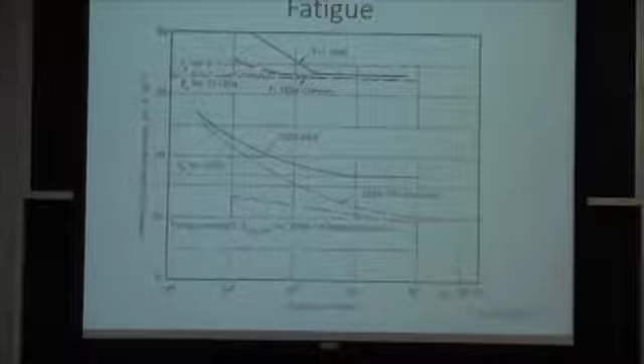Professor Eager asked me to prepare this relatively general talk, because today we'll talk about safety factor as it applies to different industries. There is a handout if you came after the others. The idea here is not to be super specific.

There are a few ideas I want to carry out to you, one of which is we don't really design structures stronger than they need to be. So when we say we have a safety factor of 2, that's based on a nominal analysis. It doesn't take into account all the worst case scenarios that we know of or we don't know of. So when you take everything into account, it's more from experience that we know if we build it twice as strong, we should be able to go through a 50 or 100-year life with a probability of failure on the order of 10 to the minus 6 or something like that.

So that's a little bit how we're going to go today, saying the safety factor of 2 is not for somebody to use, saying I have a safety factor of 2, well I'm going to put only half the bolts, I don't really need the others. That's not how it works. In reality, you only have a margin of, say, 20% or something of that order. And it's just for whatever mistakes along the way, or improper use, or any condition that was not considered in the overall analysis of the original design, and normal statistics.

So that's a little bit what we're going to go through. There'll be quite a few examples. I know Professor Eager talked to you guys a little bit about welds and weld inspection, so we're going to go back a little bit to welds and bolts today.

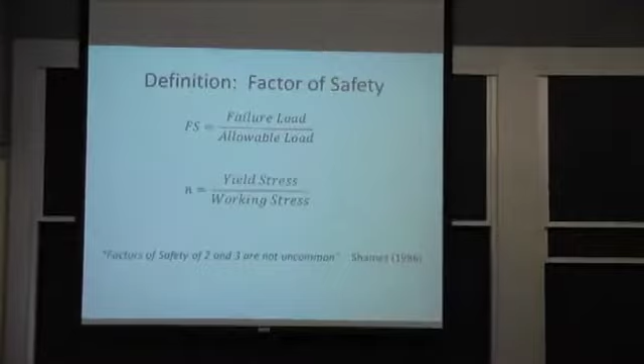When somebody that's been working, say, in automotive, says they use a safety factor of 3, they have a very particular way of calculating what the capacity is, the failure load, and what is an allowable load for that structure based on wheel data. They put sensors on the wheels and go through rough roads and say, well, this is the highest load. Or they just take the weight of the automotive and divide it by 4 or something. That will make a big difference when it comes down to determining the safety factor you need.

Did you have a question? You answered it. Okay.

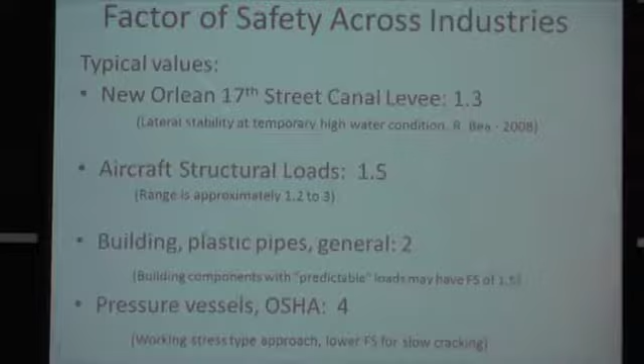So we have a big range of numbers. The failure of the canal levee in New Orleans was very unfortunate, and when they went back to the design, they said, oh, safety factor of 1.3. Well, it turns out that that's what they designed it for, and it wasn't enough.

And when Professor Eager talked about learning from disaster, that's an example, because even though you were supposed to have that 30% margin, and it's big, it's huge, it's relatively easy to analyze and inspect, I think there were issues with the soil. There were a lot of things going on that were hard to predict, 50 or 100 years before. And that's why at the end they didn't have the capacity they thought they had.

So it was clear that in this one the water level was not higher than what they designed it for. So in our analysis, we look at two things: the capacity of the structure and the load applied to it. So the load was taken into account in the design. It's not as if there was an earthquake happening at the same time. It was just water level. The capacity was not quite what they thought it would be through the design life.

The aircraft structures, I put a 1.5 safety factor because 1.6 maybe would be the one that I've seen most. I worked for a bit at Bombardier Aerospace. They make small airframes. And at the end of the day, you go to a lower safety factor around the landing gear. It's typically very well inspected, very well determined. They have sensors everywhere to know exactly what the load history is for the landing gear, and therefore they can afford a lower safety factor.

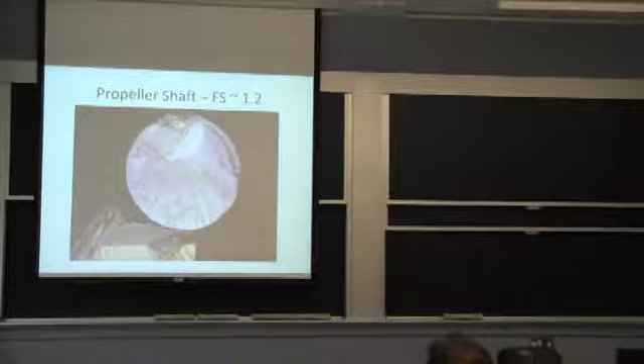I got 2 examples here. This is somebody I did a big project for, and he had a fancy high-speed boat he was using in Florida. It's about a 4-inch diameter axle, connecting all the way, sticking off the hull in the back and connecting the prop. It went only to, I think, a season and a half.

So he was into his 2nd season, and the prop fell off as he was on a ride. He was really surprised, that's why he brought the piece. He wanted to figure out what happened.

Because it was fairly high performance, it's not really a catastrophic failure. I mean, it depends how you look at it, but the boat stops and then you need to use the radio and get somebody to pick you up. It's not that bad compared to other types of failure. So they had a very low safety margin, and this was a type of prop that sticks out of the water half of it, so you only have the lower half in the water.

If I try to do here, let's see, I'm out of luck. Huh? Where are the chalks? I have to bring my own stuff, maybe. That sucks. All right, no board writing today.

So it sits sticking out half of the water. You have a lot of bending in that axle. As the shaft rotates, what I would expect is to see cracking initiate all around, because that highest load would change location as I rotate, unless I have an unbalance in my prop or something like that, maybe it could be localized.

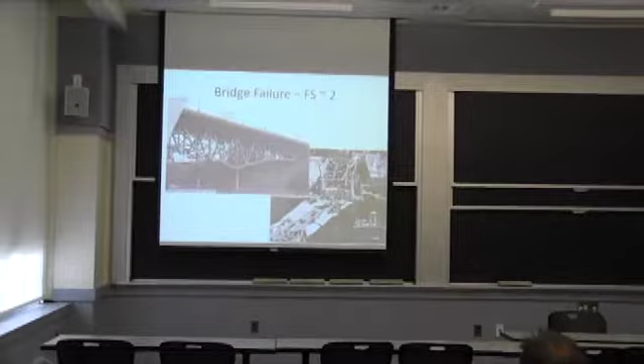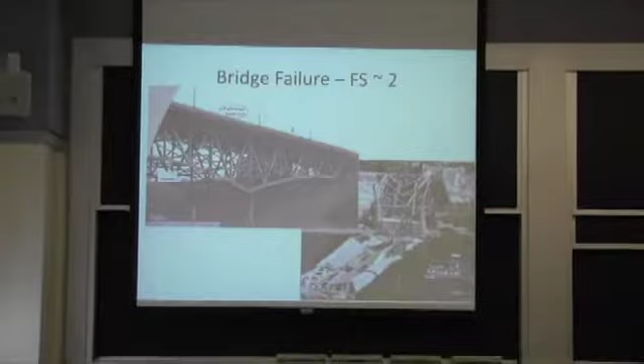We'll talk a little bit about the bridge collapse in Minneapolis. That happened, I believe, in 2007. It wasn't at rush hour traffic, but kind of just before it, I believe. It was late in the afternoon. It was a very hot day. So if you're thinking about a steel structure, a very hot day means thermal expansion. It probably had something to do with it.

There was a lot of dispute because this collapse was investigated first by NTSB, and then MnDOT took over, and then experts for the different parties involved also got involved in analyzing how it all happened. So you have the bridge to begin with. It only had two main trusses, one on each side, and it's connected here in such a way that if you fail one of these connections, the bridge is gone.

Everybody's analysis proved that. Now, despite that fact, URS, a very large construction company, looked at the fatigue life of the structure. They did a fatigue assessment after approximately 40 years of service, but they only looked at the members. So at the end of their report, they say the members are fine, but we don't know about the joints. So what good does that give us? Really nothing. You shouldn't do something to feel more safe while in fact you're not looking at the right thing.

I would say around 80%, maybe between 70 and 90% of failures happen at joints, especially if you're looking at a structure that's that complex. In this case, we were looking at gusset plates. So you have members connecting.

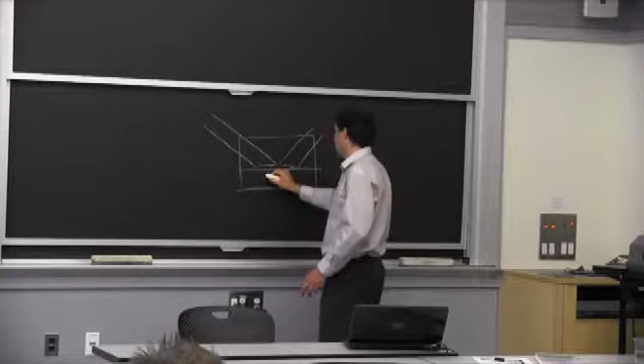Apparently, and that's what the government found - whenever I present these cases, I was involved in it so I can't talk about all of it, so I'm mostly going to do pieces that can be helpful to you guys, and mostly public information that was provided by some people that did the testing.

What the people at NTSB had done is they went back to the design drawing and looked at the thickness of that plate, and somebody said it wasn't thick enough according to the rules of designing back then. Well, that's not good, because if we start with a safety factor of 2 but we miss out on the thickness right from day one on the erection drawing, we don't have a safety factor of 2 anymore. It's less than that.

And then you can imagine that after 40 years, that bridge had lanes added, pavement added, corrosion, and it came down. If you add it all up, there wasn't any safety factor left. The load applied exceeded the capacity of those joints.

Was there ways to prevent it? Of course there were. These inspections were going on regularly - not every year I believe, but maybe every 5 years - they had inspectors. Whether it was a little inspector or a super big inspector, it's a little different when it comes to maintenance than when it's a new structure.

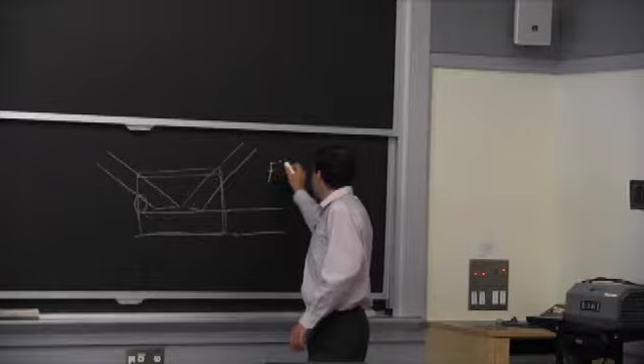We had a factor of safety of 2. Well, you look at it after the fact, it's not 2. You just try to figure out if you lost 50% of your safety factor or if you lost all of it. That's what it boils down to. And you hope that it was actually designed with the intended factor of safety, which is not always the case.

So a very sad story. I was involved in the investigation for a while. And one of the issues was also the rollers here to allow for expansion and contraction of the bridge.

It's clear that they were not moving as much as they were supposed to move, which means that the bridge was warping up and down or sideways or in some form of ways over time, and that was not taken into account in the original design as well.

If you do it symmetrically, say on the east and west here, that may or may not be a problem. But if it turns out that one side is stuck and the other moves, then you start wrecking your bridge as you go back and forth from one season to the other, and it becomes a problem or a potential problem. So on a big structure like this, I would say...

When you're designing it, I think it's very hard to take all of it into account, and that's why you put it here as a safety factor of 2. But like I mentioned in the introduction, it doesn't mean you put half the bolts, because a lot of it are things that are very hard.

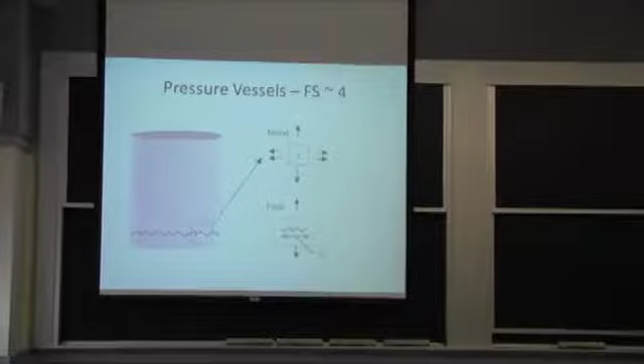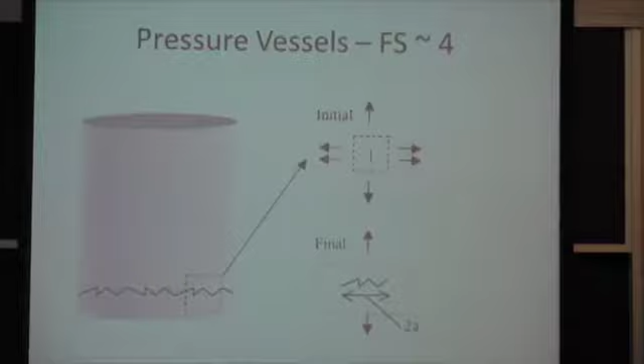Pressure vessels. I want to talk to you about two examples. The first one is just a simple pressurized stainless steel tank in a food processing plant that was mostly intended to hold, I think, tomato paste or something like that. So it's not especially corrosive, but it has to be clean. So it was a nice stainless steel tank.

And it turns out that it was a heated process. So they had a jacket around the tank. Turns out the jacket had a lot of chlorides in the insulation. And therefore, something that they were not expecting did happen, which is called stress corrosion cracking. It started to crack from the outside of the tank.

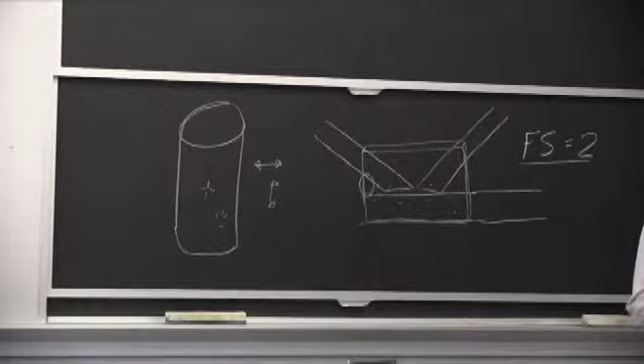So say we have it here. It's pressurized. So it started as a little crack running this way. And then at the same time, I also saw cracks almost going in random direction. It will look a little bit like this. Now, when I see that, and I know my stress level in this direction, so for a load applied, the hoop stress this way is twice what the longitudinal stress is on a closed pressure vessel, I know there's a problem, because it means that my cracking doesn't vary much with my stress level.

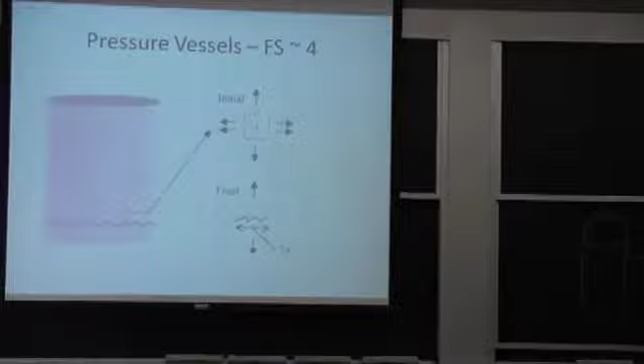It's just cracking. So even though I started with that factor of safety of 4, which would typically be with respect to yield stress, I can have stress corrosion cracking at a load 1/5 of that yield stress, depending on the chloride environment, the temperature, and all that. So all of a sudden, I don't have a safety factor.

Now, in that particular case, it's really a problem with respect to what I expected the capacity to be. If you expect a ductile behavior of a piece of steel and it fails in a brittle manner, that will make a huge difference with respect to safety. And that's pretty much what happened there with that stainless steel tank.

I mean, in normal condition, it would just crack and leak or do something like that. But what really happened instead is it just started to crack, and these cracks all connected, and eventually a big piece came off, and it was over pressurized as well. So there were a bunch of issues going on, but one of the main contributors here was an unexpected failure mode. And that's the idea I wanted to carry here. It's one of the reasons we have a high safety factor.

I've done another project that was for a steam piping system connecting in Washington, D.C. with, we didn't go to the White House, but it was supplying the whole government building area. And we looked at a drip leg that essentially was collecting the condensate. So say you have a line, and at the bottom of the line you have a jump here between different sections. So in the manhole you have a little drip leg here that collects the condensate and redistributes it back to the system. So the connection here at that drip leg was built in an unusual way.

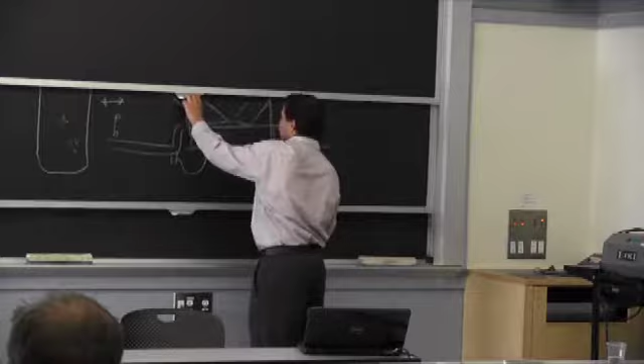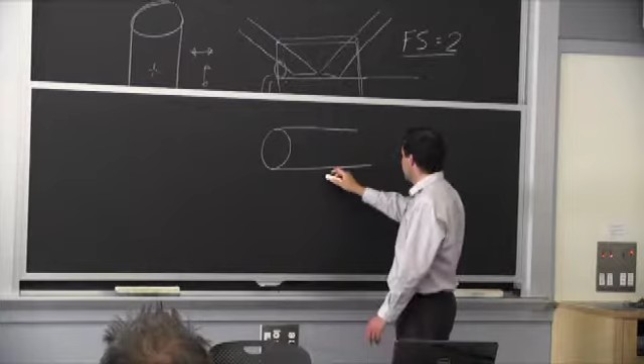So it had the proper material thickness, but I'll show you the detail of that one so you get an idea for what may have happened. So the pipe was running, so I'm going to show the pipe running this way. So if we start from here and we have a leg that's connecting straight through, so it looks somewhere like this.

So it's really two tubes connected to one another. This one is smaller, that's our leg. Oh, and we're actually going to look at that cap right here. Yeah, let's do it this way.

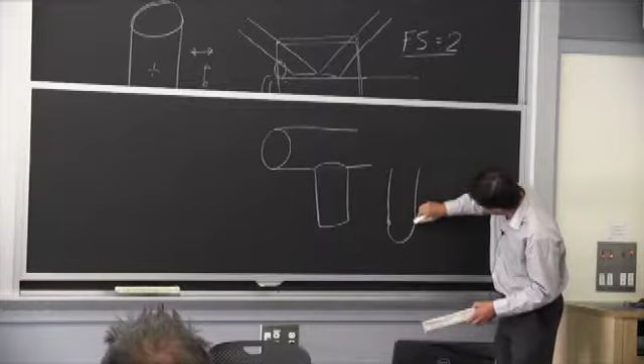So that's how it looked from the outside. So instead of having a bottom that would look like half a sphere, something like this, you could put a weld here, and the weld is essentially subjected to the same load as the wall next to it. What they had was the weld in this corner, and when you pressurize this design detail, it just wants to expand.

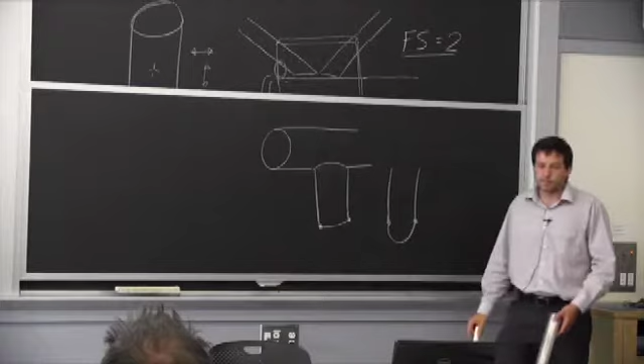So you're cracking open those welds. You started with a safety factor of 4, 5, 8, whatever it is. Now, instead of having just a tension stress on the welds, if I blow this up, the way it looked is they had an end cap like this. They had the wall here.

And it was sort of welded here. So what happens when you pressurize this, the cap wants to bend out and become more like half a sphere, and create tension here at the toe of the weld—at the root of the weld, I'm sorry. So the toe is right here, but at the very root of the weld, where you can't really control the quality, you know you have imperfections there, that's where the highest tension was. So unzipping from that root was not a very hard process.

It's not something... well, actually, the code says you're supposed to use these kind of caps, or find a way essentially not to put the highest stress on your welds, because otherwise there's no point in having these thick walls if the capacity of your connection is only half of the capacity of everything else for this application. So we were looking at something that was 3/8 of an inch, or maybe half an inch thick wall, with a little more than maybe 3/4 inch cap, and it had this weld that was pretty much the same size, but loaded in tension at the root of the weld, so no more safety factor left.

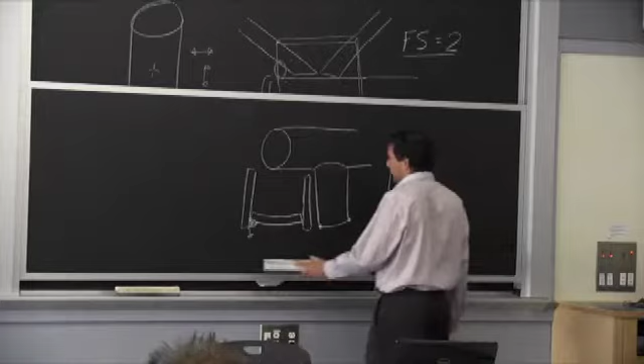When the transient loads came up with a big water hammer, this was really ready to go. So that's how you consume safety factor.

So was that how it was designed, or was that a decision made during construction? I would say nobody was able to show exactly who made the decision. So it was possibly part of a repair, and that's part of the problem sometimes. If you go to do a repair, they know they have to use the right thickness, but when it comes to the detail and how to do it, that's probably where they were lacking proper engineering of it.

So if we're looking at these factors of safety, and we're trying to decide, do we need 3, do we need 2, 1.2, 4, 5, 8? I've seen designs that have a safety factor of 8 actually, and people can still break the stuff, but not the way it's supposed to be used.

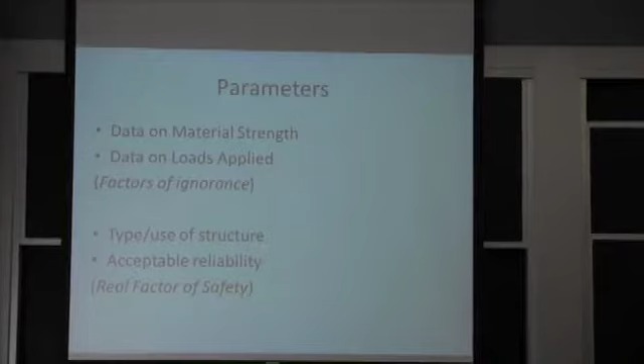Even the little propane tanks—if you want to solder something, you go to Home Depot, you buy the little propane tank with a torch on it. They have high safety factors, but if you drop it from 6 stories high, eventually something bad can happen.

Well, okay, we talked a little bit about material strength, and I said something like, if I have my steel 4340 on the landing gear and it's going to be inspected, I know what I'm getting, and it's pretty much true. If I deal with a casting, for example, I don't know as much, and a lot of times with a casting we have an additional factor of safety that we put in, because we're going to inspect it a lot—there's going to be something additional, it's not as predictable.

If we're looking at the environment, it's a good example when I showed you the chlorides from the jacket of that pressure vessel on stainless steel. If I don't take the risk of slow cracking into account, or if I cannot rule it out, then I need a higher safety factor. Actually, I should figure out whether there's a risk for that environment to be there—temperature, moisture, and chlorides, in the case of stainless steel.

But the less you know, that's my factor of ignorance here. The less you know, the more of a safety factor you need. And sometimes it's not a question of effort—sometimes for an application, you just don't know all the possible environments. So you have to be more conservative than if you have your landing gear and it's going to be inspected regularly. You don't allow for any significant corrosion to take place, a very controlled environment. Then you reduce your safety factor.

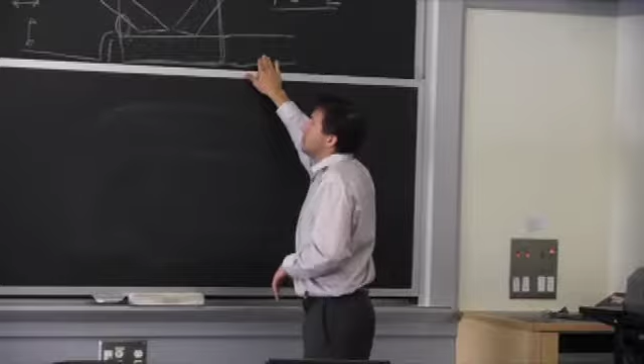If you go back even 30 years, when the Minneapolis bridge was put together, they couldn't do even the finite element analysis that we would probably do today for such a bridge, given the details that were in it, or we wouldn't do the details. But if you start with a bridge and you have your safety factor, down the road, it's by experience.

If we've been building thousands and thousands of bridges over a 100-year period this way, and we get the failure rate that we're willing to go with, there's no reason to change the overall safety factor. If we're getting more failures, a little bit like what I'd say is happening with the valves for blowout preventers, then you have to raise your safety factor. You're just not good enough. That's the experience aspect.

If you're coming up with new products, you may do a lot of testing, actual laboratory testing or field testing, to see if you've taken everything into account. You do that a lot in aerospace. I remember, for example, the wings for small jets being moved up and down—held where the fuselage is with all the bolts on—and they moved the tip of the wing at least a foot up and down to go through excursions, maybe more. They had the extreme one, so the very last cycle was kind of all the way until it breaks, and it was a lot of deflection.

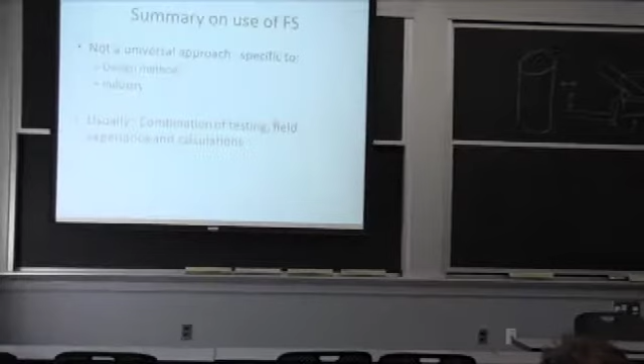It doesn't really apply to the primary structure—you don't want the frame to wreck completely. So a lot of times, to know your safety factor for the frame, you do need to do some analysis. But if you're really looking into evaluating if your overall assembly is going to fit the function, there's nothing like a full-scale test or a field test to demonstrate that, and it's required for a lot of aerospace assemblies, and they do it also in automotive and with recreational products. So calculation's always good, but my point here is if you're only going to do calculations, I would say boost your safety factor, because there's so many things you may miss out on in the integration of your assembly—things that are much harder to predict ahead of time.

So when we arrive at those safety factors, I mentioned it's from experience. I'm not going to tell you that people did a lot of statistics when they came up with safety factor 2—they didn't. Today there are a lot of people, and I have a book here, full of statistics on how you could relate actual failure rate to individual parameters and stuff. We'll use some of these ideas just to get an idea about what happens between a safety factor of 2 and a failure, whatever that is. Because again, my basic line for you to take out today is we don't build stuff much stronger than it needs to be, so we can't think of the safety factor as something that anybody can use for their purpose.

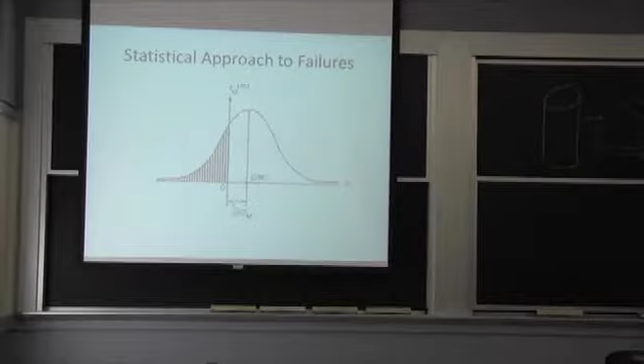So if we go to the lab today and we have 5 welds and we test them, we find out the strength in tension. Well, probably these 5 welds were made by one guy. If I have other welders do it, they'll do it differently. If over time they're instructed by different people, it will also change.

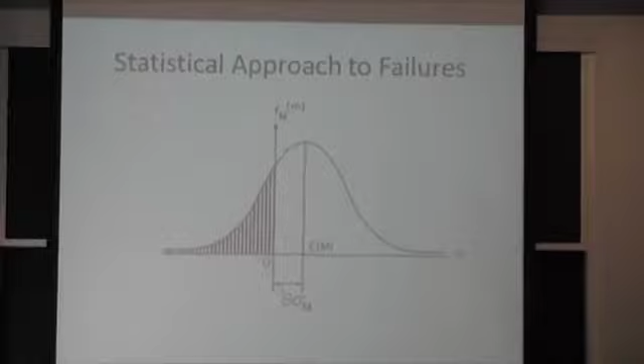So when you come down to a large population—I've just put on this basic statistics here, it's a Gaussian normal distribution, and we're out here about 1 standard deviation—it will essentially say 65% of the population here is in the good area, and then you start having failure for the lower 35%. So that's something that can happen if I run these 5 tests. I still have that tail of strength levels that are quite possible coming from different welders, different inspectors, different instructions on how to do it.

But I'm not going to know that. So that's why I say after the fact you realize, well, I really need that safety factor because I have variation. That's the idea. If the variation is tight, if that curve is really tight because we're dealing with a machined steel component, no welds, no nothing, like in the landing gear, then I'll go with a lower safety factor. My standard deviation is much smaller.

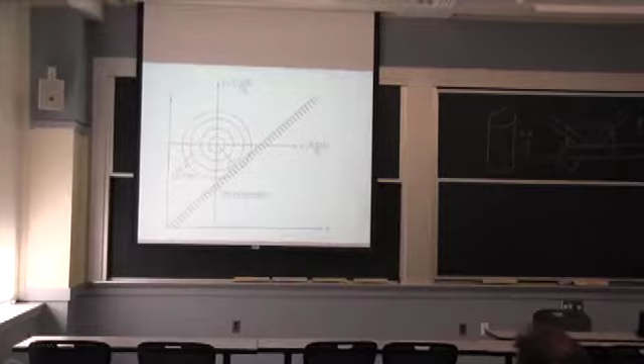So that's the book here, just in case you're interested in the details. It's a lot of statistics, like I mentioned. So what we have here is a plot of capacity, that's the vertical axis, against the stress level. So it's centered, say, where we would do the design. Say we have here a safety factor, looks like just about 2.

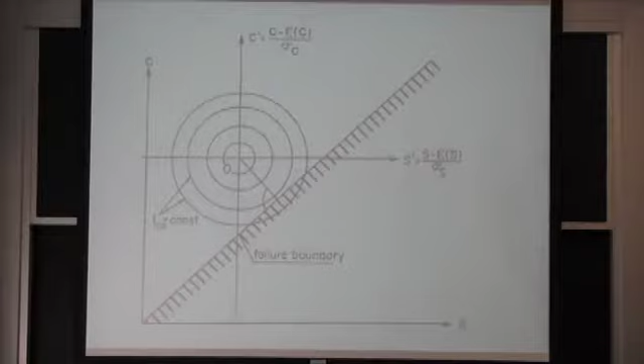And then we know we'll deviate from that. This one is circular, but it doesn't have to be a circle. It's likely... well, I'll take this back. It depends on the application. If I'm dealing with a pressure vessel, and I know I don't have transient regimes, I would say I know my stress very well.

So on the horizontal axis, I could make this circle more an ellipse pointing up and down because I know my stress level, so my uncertainty about that one is going down. For that same pressure vessel, if I don't know all the chemicals that may be used in it, or the kind of jacket it's going to have, my material variability may grow, so that would make a vertical ellipse.

If I'm looking at something else, say I'm designing suspension for a car, and I'm making it out of steel, I know pretty much what the steel will do to me if it's not welded, if it's forged. So I'll have a relatively narrow variability in capacity, but then what people will do with the car, I don't know. It could be very terrible. If you take scenarios, they burst the tire and then the wheel hits the ground, and whatever happens, you can get to higher loads than what you would even make a measurement of in a field test condition.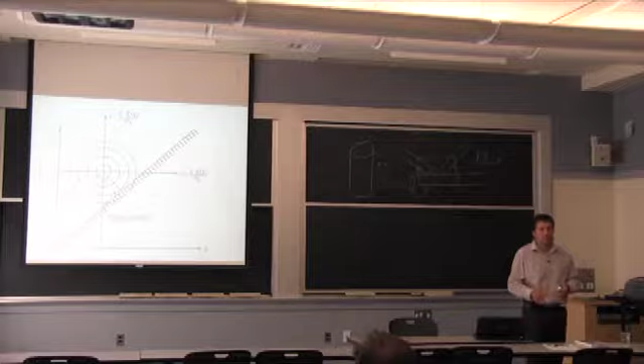Yeah, I would say hitting straight with the wheel decreases your damping factor, and that's where you essentially generate more stresses in the suspension.

So if you want to make a very detailed design and take into account what I just said, then you can put this target closer to the failure boundary because you're reducing your variability, or you're taking a worst case scenario. But if you're making an analysis based on the weight of the vehicle and thinking, well, maybe it's going to go on 2 wheels or something like that, then you need a higher safety factor because you're not taking everything into account.

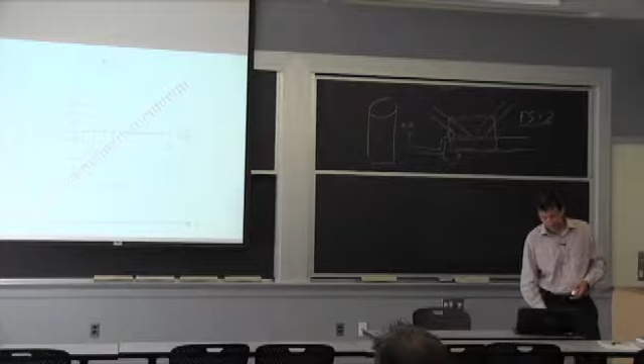So it's the general idea that it's not a factor of safety of 2 because I have variability in capacity and I have variability in stress level.

Now, what do we need at the end of the day? And that's when we talked about a 10 to the minus 6 type failure rate for bridges. What we're looking at here is this portion, now it's a 3D representation of the same thing we were looking at, where we have stress level and capacity. Where the cut is defines how much failure rate, how many failures you're going to get per year or per 100 years. It's a very important number.

At the same time, we cannot do the math to know exactly how to design different things starting from that principle. It just helps us realize we have that factor of safety, but I don't want to come up with a new term for it, but I think you realize it is there for safety. That's true, but it's not really the extra margin that you have. You don't have too much of a margin, and we'll go there.

It's just about time. This is how people define failure rates. So I was talking about bridges that have a lot of people on them. What happens here is you have T and L. The T is the number of years of service, and L is the number of people that could be affected by a failure.

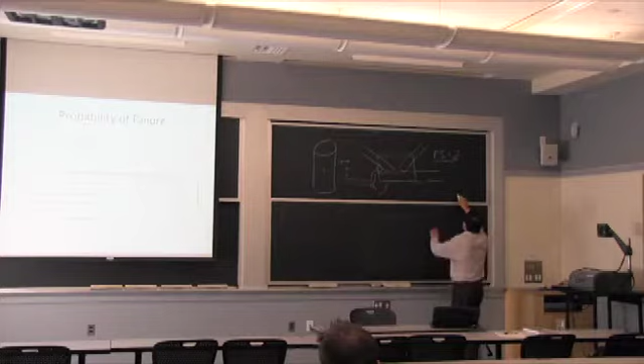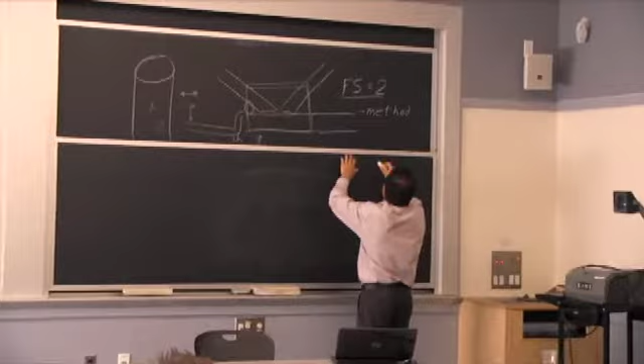And it's the combination of the factor of safety - I'll put the method here. What else did we talk about? We talked about variability. And I'm sure there's more, but if you start at least thinking of these three factors giving you a probability of failure, we're on a much better track than if we're just thinking, oh, we're just going to raise the safety factor. You can use a more precise way of calculating your worst case scenario, but get more knowledgeable about all the possible failure modes, like stress corrosion cracking, and eliminate them.

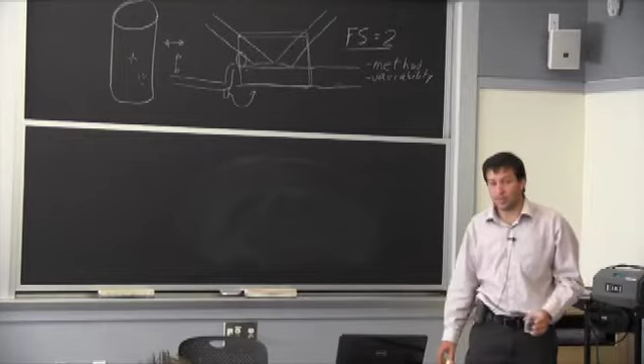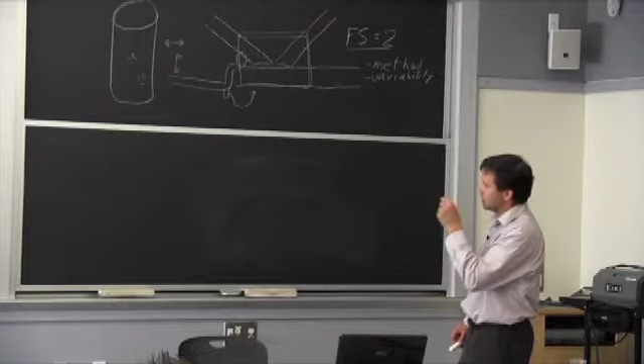Now that safety factor of 2 that we started with - say we start here, safety factor of 2 - that will give us, within a 1 sigma interval, so plus or minus, maybe 30% of the time, it's going to fail. That's not good. So it's the general representation when we're looking here at probability and we have this stochastic safety factor - that's the actual ratio of capacity over demand, after everything that was not taken into account. It's not by design, it's actual.

So you can see that if we start with a safety factor of 2, and what we want is a 10 to the minus 6 probability of failure - as a general case here, this is not always the same, it will depend on our method and variability - but as you want to reduce your risk of failure, your actual factor of safety goes down. So the probability to have one failure in 10 to the 6, if I start with a factor of safety of 2, means that I only have a 20% margin.

And that's I think the best demonstration of when I said put all the bolts in - that's why, because you don't have that safety factor of 2. If you put half the bolts, probably you have a 30% chance of failure or something like that. So that's the range that we're looking at as to what is our nominal factor of safety as opposed to actual, or stochastic, here.

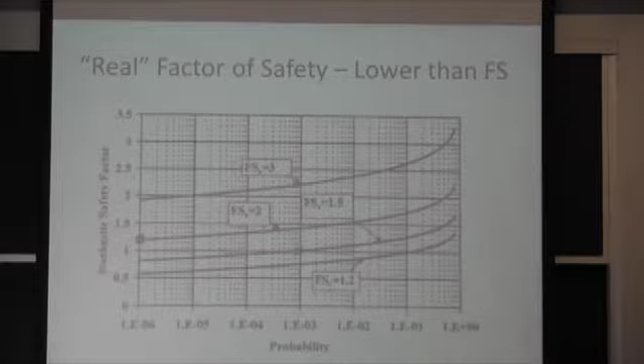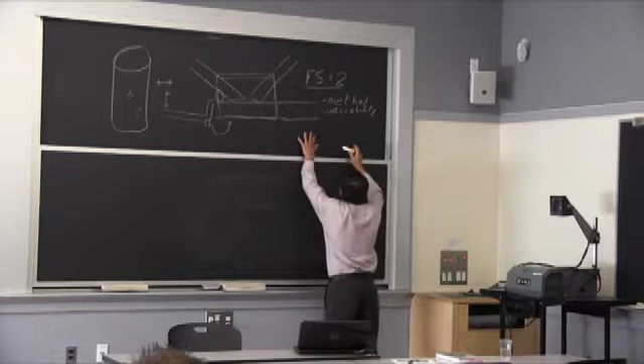This made me think - you can relate to this - when you start with a factor of safety of 1.2, then you get to a failure rate of 10%. It's a little sarcastic, it means 10% of the time you'll actually fail if you start with a 1.2. But again, the variability and the method will influence the shape of those curves. So you can have a long service life with a factor of safety of 1.2 if you are very conservative and detailed in your method, and you take into account all possible variability in terms of both the material capacity and the stress level.

That makes sense or no? Yes? Good.

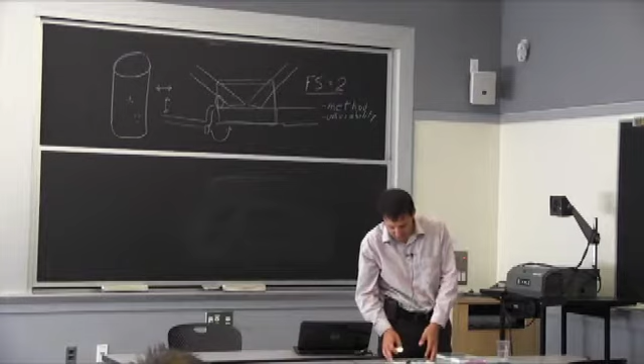Let's go through some examples. Now, so what I tried to do, I hope you realize, is bring a little bit of theory along with some examples, and I'm happy to discuss and get some feedback from you. This is kind of newly put together, but the idea is mostly to be as conscious as we possibly can about what that factor of safety means, or safety factor.

The spar for a helicopter blade - what we're looking at is a cross section of that blade, and it has an aluminum spar at the front here, and then a honeycomb core structure with an aluminum skin all the way to the back. So this could be about a foot across from the tip to the tail.

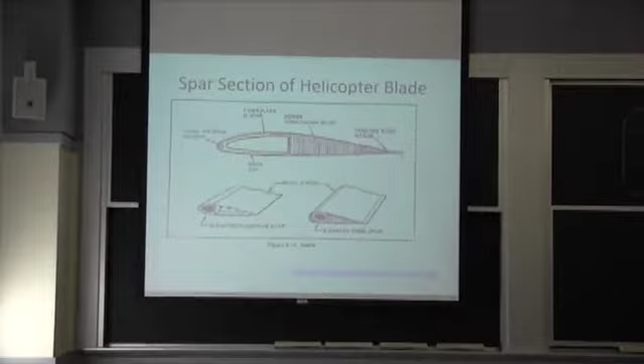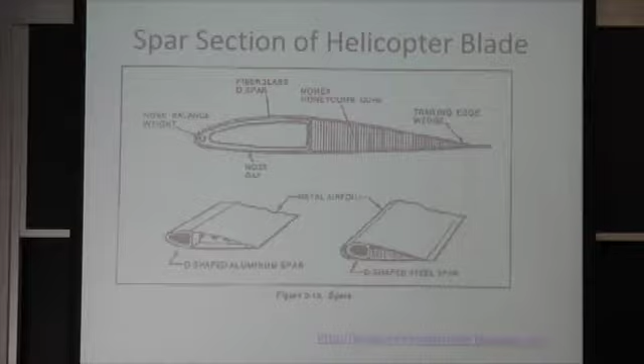It's subjected to a lot of load just by rotation. So if I draw that blade from the rotor, you rotate at high speed, so you'll have the centrifugal force creating tension this way. So we have the leading edge right here. That's where the highest tension is going to be because of what I call the drag force. So we have the wind, the air pushing the blade backward, creating that bending moment in the rotation direction. And then we also have an uplift.

Otherwise, the helicopter wouldn't be that helpful. So we can tell right from the beginning that we're looking at the highest tension right under that nose here, because that's where you have a combination. You have tension generated by the centrifugal force, by the uplift, and the backward load.

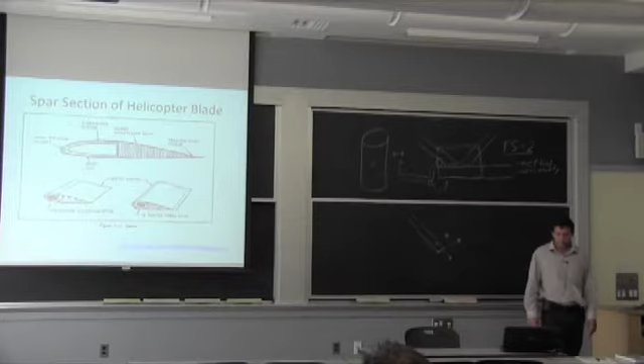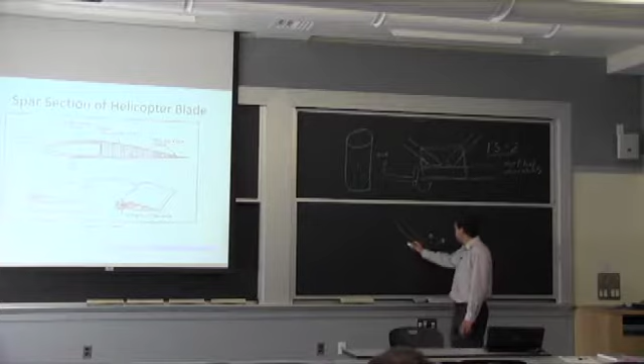Now, do we know that load precisely? No. The best way to get it, that I've seen, is they put strain gauges right there, close to the rotor, just before they had the stiffeners. So they put a strain gauge there, find out what the stress level is for different service conditions, going up, going down, taking off, turning sharply.

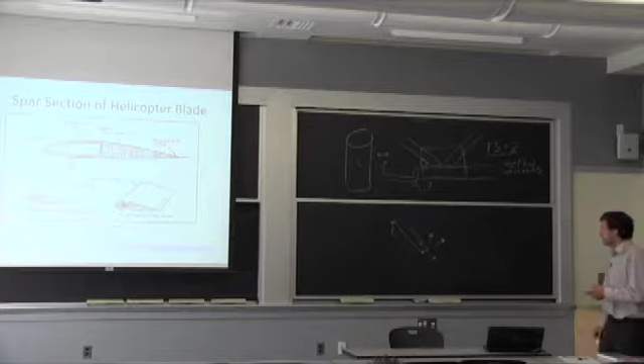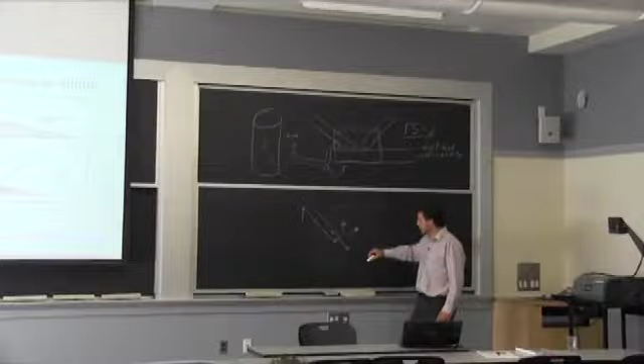So you get some idea and you can rate it. Landing and takeoff will definitely be the highest cycle for this centrifugal force. You just have to decide how many cycles you're going to be willing to go through, and determine the life based on that. So if I throw a number, say 30,000 cycles is what I want to go through. And then I know my stress level, so that would give me my number of cycles. Say my stress level max, I'll put 12 KSI. It's aluminum, not going to be too hard on it.

So what does it mean? It means that I need a sigma, I'll put it as strength because it's fatigue, and minimum, say we add 50% to that, so we'll be at 18 KSI.

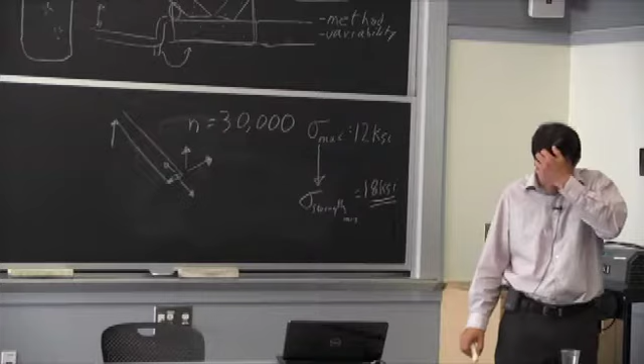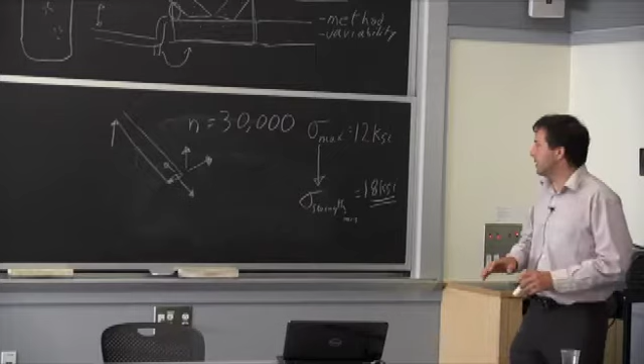Well, that's not that easy. It's not that easy to get an aluminum alloy that will take 30,000 cycles at 18 KSI, depending on the surface finish you assume and all of that. But it's the general idea. So that would be designing with a safety factor of 1.5 based on stress level. You don't want to take that number and divide by 1.5 and just calculate for another number of cycles to failure, because these fatigue curves are very sensitive to stress level.

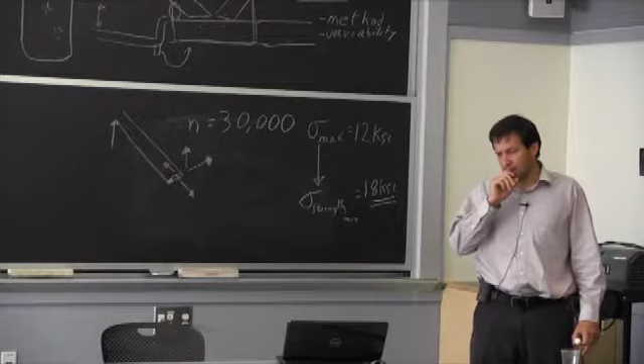So at 12 KSI, most likely you have infinite life, no issues whatsoever. But at 18, now you have a limited fatigue life, and you have to see if you can make it to the 30,000 cycles. That's the general idea. I've done that a couple of times, I guess, and you can get into the very fancy details.

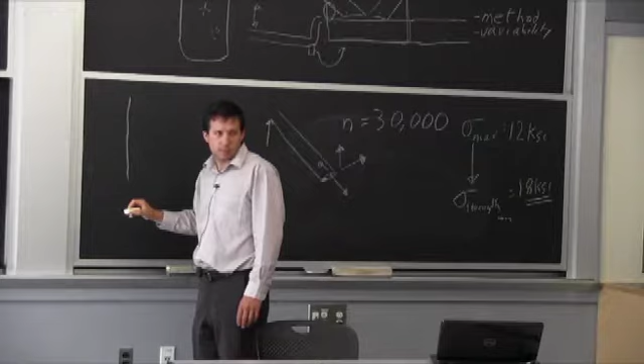I think you're all familiar with stress-life curves, SN curves. So you have your number of cycles to failure, you have your stress level, and you expect a curve something like this. Say now we have a generic material, but normally I'd be able to get 12 for one specific type of loading, if we're looking at tension or tension-compression, whatever it is, and we'll do the overall range here for stress level. So what I do, because I want a safety factor, I'm looking at 18, and now I'm looking to see here, given the variation in failure life, if I'm going to get my 30,000 cycles.

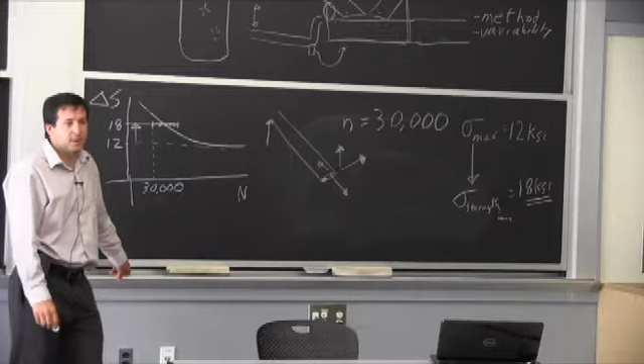That's the overall exercise, and we can go through the math. It's not that complicated. Typically, the more data you have to generate that curve, the tighter you can make your confidence interval here, and therefore you can satisfy yourself and everybody else that you do have your 1.5 safety factor. That's exactly how I would approach this in a schematic way.

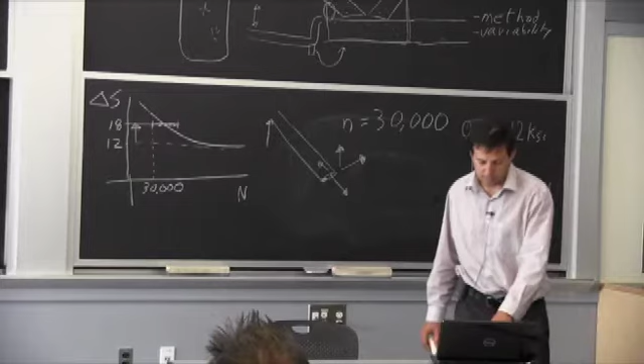So that's in reality, if we look at it, we have experimental data points. This is very different. Now the stress levels are higher. We're looking at some turbine blade data, so it's a super alloy type material. It's got a much higher stress level than what we looked at here for the aluminum.

So this was a situation where they were trying to evaluate if they could change the alloy from one to the other. And given all what we talked about, to get to a good reliability, you need your field experience, you need your testing, large-scale testing, you need calculation, you need all of that. So when you go and change material, a lot of times, to make sure you don't affect your factor of safety, you try to compare them with respect to every single property, or at least every property that matters for your design. And that's what we were doing here.

And the original alloy, I can't say for sure which one it was. I think it was the blue one. Yeah, so anyway, one alloy is the original, one alloy is the substitution.

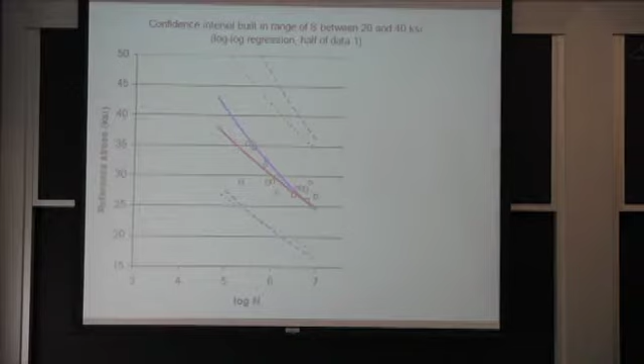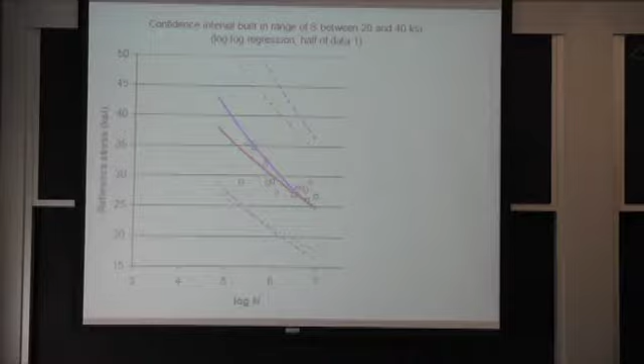Given the limited data you see there, because that happens when we're talking about fatigue, it takes weeks for each data point sometimes. So it's not easy to get a hundred data points and be as sure that you don't have a problem than if you're doing tensile tests. You can do a lot of tensile tests very quickly and figure out the strength. You're still looking at cost of material, cost of machining, and everything, but fatigue is a lot more expensive than the other things.

So the point here is you have those curves, and you see that they overlap. At the very end, you have the red line being slightly different slope, so it becomes a little higher, and you see that on the confidence interval. Those dotted lines are built essentially using the range of data.

Arriving at what is kind of the equivalent of standard deviation, but for a 2D plot. You can do it two ways: based on variation in life or variation in stress level. If you try to do it in Excel, it's going to try to minimize the vertical variability, but in reality it's the horizontal variability a lot of times that we care about. So we have to reverse the plot to do the analysis.

It's not a big deal, but if you think of it a little bit like I drew here, we're interested for a given stress level how much variability in life we're getting, as opposed to for a given life how much variability in stress we're looking at. That's not really what we're interested in. So it's just a matter of how to run the analysis, which makes a difference for these curves.

We're looking here at probably a 95% confidence. If we start with a life at 10 to the 7 cycles of 25, our confidence interval, because we don't have a whole lot of data, is all the way down to 17 and 18. So when we're talking about that safety factor, we want a safety factor on top of taking that variability into account. Otherwise we just consumed all of it already.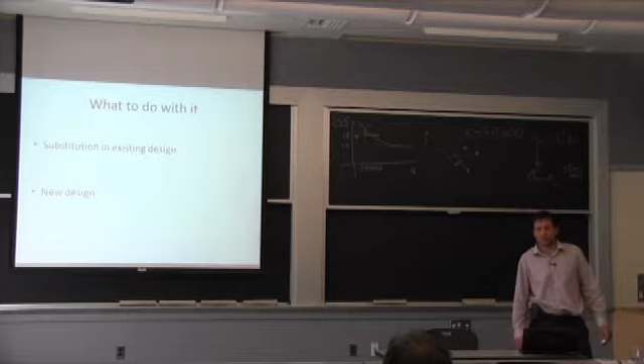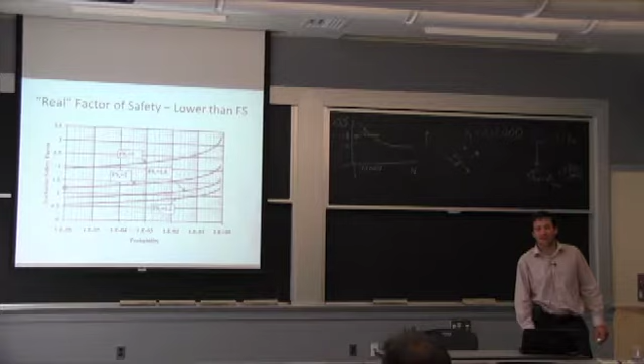It's not, that was not the idea. It's always easy to say, well, I'll use the margin, or I only use 30% of the margin. But if your actual margin from that plot here is only 20%, nobody's allowed to it. That's really the idea that I want to stress out.

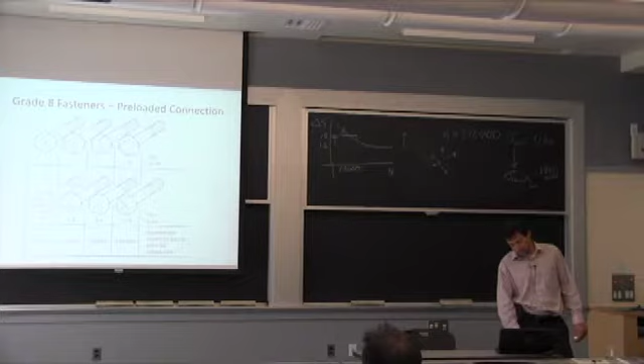This is going to be really brief here for bolts. The main thing I want to point out is, well, you have different grades. A lot of times we specify grade 8 if we're going to have a connection that we don't want to slip, so we preload the bolts and it's all tight. It's relatively common in advanced structures. We're looking at a strength of the material to be about 150 KSI for steel.

Then this is a different version of a stress strain analysis for fatigue. So we have the stress amplitude and the mean stress. There was a way I explained that last time that worked. So what do I know about a material?

If I don't have a mean stress, if I do a tension compression fatigue, they have data for these bolts that indicate a failure at only 20 KSI. That's low. We start at 150. That doesn't make everybody happy to realize all of a sudden you're reducing your strength by a factor of 7, roughly.

The other side of this, so that's the amplitude portion, and then we have the mean portion. For a mean portion, we know that we'll break the bolt at no amplitude, so just an overload, if we go to the 150 KSI. So this simple Goodman type analysis just says, well, between those two conditions, so a tensile test and our nominal fatigue test, we'll just draw a straight line. That's what the analysis is.

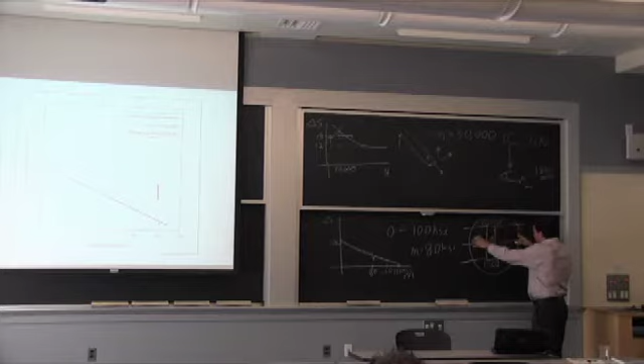Think of it in strain. So here, say I get a strain of 0.1 percent, probably less, but over here it's much bigger, so the overall variation in stress here is going to be divided by 7, essentially, approximately, because there's no separation. If you exceed that, now you're in trouble.

Now, one of the reasons for you guys in the context of this specific lecture is to say, if I don't calculate all of this, if I don't go through this method, how am I going to know which safety factor to use? It would have to be 10 or something like that. So the only way I reduce from 10 to maybe 2, or sometimes even less than 2, is because I know and understand the detail that even though I started with 150 KSI, it's actually 20, but when I put it back, it goes back higher.

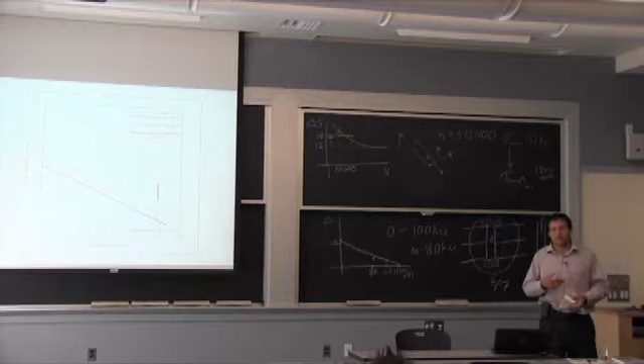There's a lot that comes into the analysis of the assembly to tell me what's acceptable and what's not acceptable. Some codes may say, well, if it's a 150 KSI bolt, use a factor of safety of 5, which means 30 KSI. But now the question is, is that for an infinite life? It really depends on your preload. And that's one of the problems with those connections. You assume that you're getting this clamping force to generate this, and therefore it's kind of the things that for a certain application need to be inspected.

For even erecting a regular building structure for a nuclear facility, they have these washers that collapse when you reach a certain load. DTI, direct tension indicator, so the inspector can just go around and see that all the washers are put in and they collapse to know that the bolts were put on to a sufficient force.

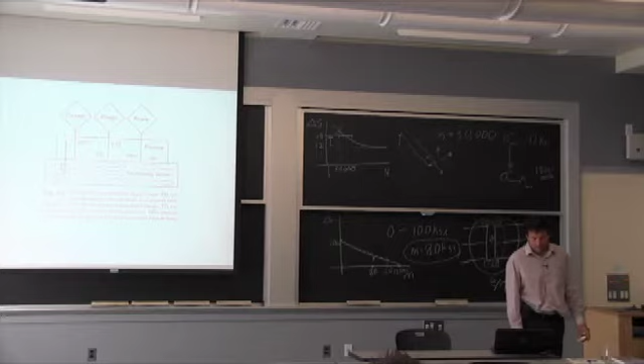We don't have time to go through the welds. So if you're going to design something, in the context of factor of safety, this is just part of this overall process. Say I'm making a recreational unit like a snowmobile. I start with a certain frame size, and I start analyzing it. I do some field testing, and eventually I get something out that may be based on a safety factor, let's say 3 for our discussion.

So if I start with 3, is that going to be enough? Well, it depends on this. It depends on what's the variability on that safety factor of 3. Did I look at all the welds and figure out that they also have a safety factor of 3? If not, maybe I want to have a little higher factor of safety. It really depends on the specifics of the application, and it comes into different parts of the design process.

You do want to think about the joints very early on, because a stupid example of that is I built a trailer that has all the upper sheet metal and cover in aluminum, and my frame is galvanized steel. I can't really connect them easily together. I got to put fasteners everywhere. If I do it again today, I'll probably do all aluminum.

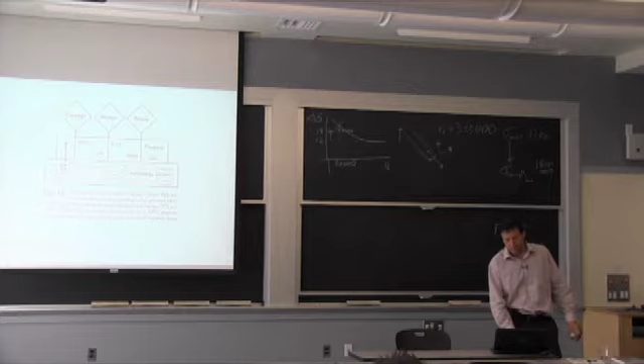It may be a little more expensive in terms of material, but I won't have that joining issue. When I started, I wasn't sure I was going to put a cover, so it's kind of part of the process. When you're coming up with something new, a lot of things that look like 'oh yeah, we'll figure it out' - first we want to see which material, material combinations, and ideas of design, trying to avoid welds in critical locations, may come in very early on.

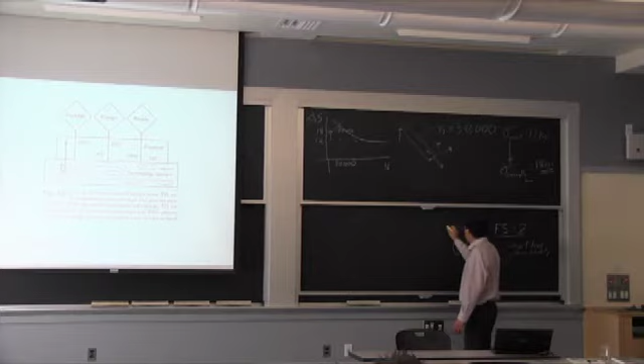I remember last term we had a student who wanted to build this vessel. First of all, he was going to do a straight cap, so I said no - it had to be these domes. Then I said, well, looks to me you're going to need some joints. So if you're going to use spring steel, thinking you're going to maximize the strength aspect of the metal - well, when you weld spring steel, you lose your strength. So it's just going to fall back on you very quickly.

So that's the kind of thing that really, in this whole process, safety factor all ties back - talking about the suspension, these welds here. You use a certain tube size to resist tension, buckling, but you want your connection to be as strong, so you have to figure out how you're going to make this happen. Is the size determined by the strength of the welds or just the buckling resistance?

You have to evaluate those things and decide which safety factor. For buckling, it's geometry - so as long as your tube is straight, you don't have to worry about stress corrosion cracking, fatigue, and all that stuff. So you have a low variation in your capacity for that type of loading, as opposed to welds. Welds, you need a higher safety factor because you don't know how good they're going to be. That's how we worked this out - we really did the bridge well.

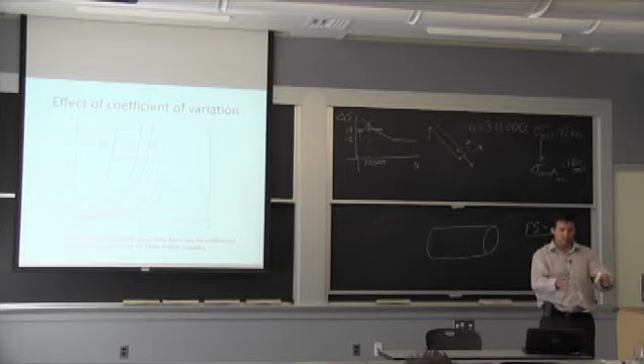Coefficient of variation just says - when we looked at the Gaussian distribution for normal distribution - if I know I'm using 4340 steel for the landing gear, and it's going to be controlled with a certain strength, a certain processing, I just narrow my coefficient of variation. Therefore I get better predictability, and I can use a smaller safety factor essentially to get to the same reliability, and that's desirable a lot of times.

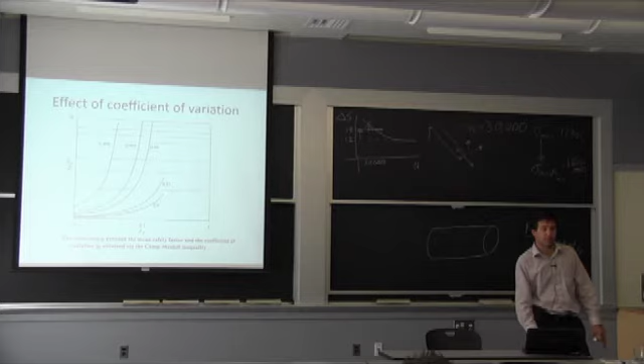I would say it's desirable to reduce your factor of ignorance in general, because you can. But at the same time, you don't want to be fooled thinking that you took everything into account. So there's always going to be a limit that you don't want to go below, and a lot of that varies between industry.

It's based on experience, and the statistics, honestly, I think just help explain why we're doing it, as opposed to being really a practical tool for deciding which safety factor to use - at least to this point, from what I know.

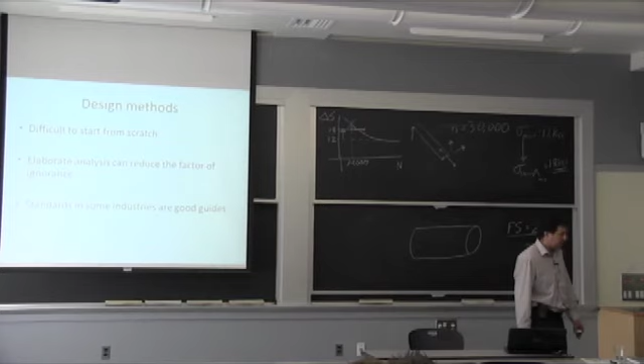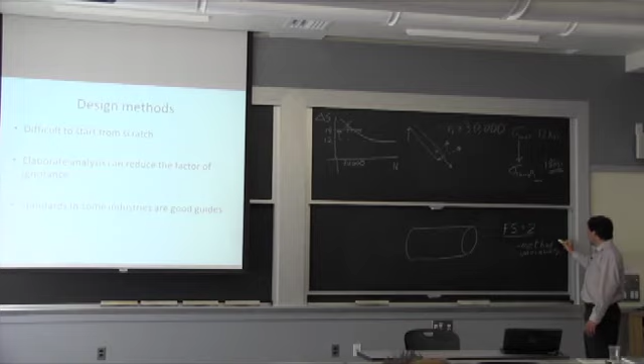In terms of design method, it's really hard to start from scratch because you have something that works. So in a given industry, if you're looking at a bolted connection, if you're looking at a weld, they'll say this - you hope they'll say this and this as well. You kind of need all three. If you try to do something with a given safety factor without a guideline on how to calculate your stress level and capacity, and having a very good idea of what the variability is on those, you're out of luck, I think.

So that's it. Any questions? Yes - in the Minneapolis bridge collapse, who were you working for?

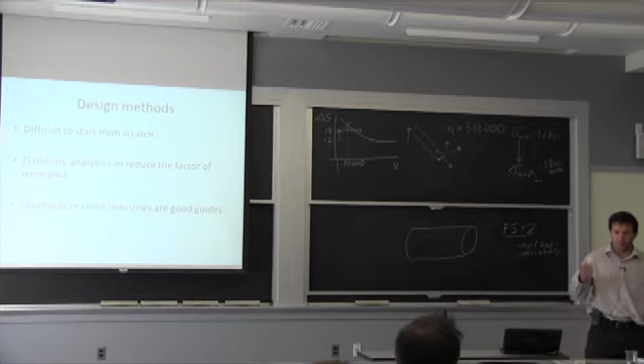It was different types of people, but it was related to the design team that originally put the bridge together. So you were their retained expert? Yeah, it was the metallurgists - it was a bigger team. Obviously they had structural engineers and all sorts of people. It was fun.

Were there many people that had hands-on experience with the design of that particular bridge, or was the organization still around? The organization was pretty much dismantled, so it was very hard to get more information than just the original drawings. Yeah, it's a good question.

But that bridge - you said it was about 40 years old - was that its life expectancy? No, you don't expect these to just come down on you. Well, not to come down, but I know that they're... Yeah, I think 50 is a rough number, but we have Longfellow right here that's almost 100 years old, and we want to keep it.